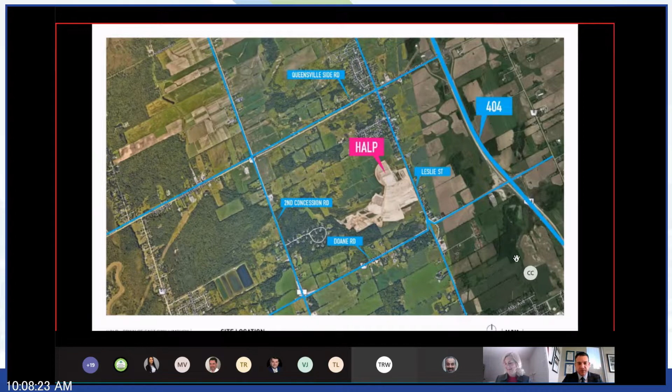Just a reminder, it's been a long time since we took that bus tour out to the HALP site with our new council. The HALP site is centrally located in Queensville, just north of Doane Road, and just a quick drive from Highway 404. Next slide, please.

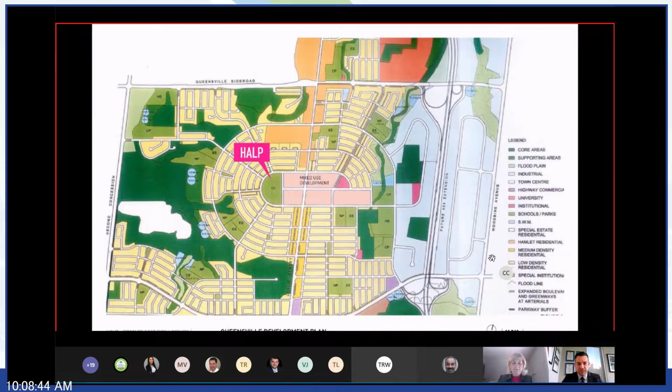The Queensville Center, building upon our initial plans with our developers, is a complete community: parks, trails, schools, community center, homes and businesses, and of course the Health and Active Living Plaza site.

I'm now going to ask Chris Catania, our manager of municipal facilities, to present the community as a design committee approach to designing the Health and Active Living Plaza.

Thank you, General Manager Karmazin. As an integral part of the concept design phase, MJMA and the Town Project Management Team have conducted an extensive public outreach campaign. More than 30 public meetings, special events, and public open houses have been held with residents and community stakeholders seeking input on the Health and Active Living Plaza design.

Public open houses were conducted, giving East Gwillimbury communities of Mount Albert, Holland Landing, Queensville, and Sharon an opportunity to seek public input into the project.

Utilizing different avenues, providing the community as a design committee has garnered over 600 comments regarding the design, programmatic elements, and facility fit for the Health and Active Living Plaza. Common themes arising from the outreach include fitness, which would include cardio and weights, aquatic programming and features, library programs, which would include makerspace and music rooms, an indoor playground, multi-purpose programming, and outdoor play spaces.

The HALP will be approximately 80,000 square feet. Of that, aquatics and adjacent change rooms will provide a third of the facility, followed closely by the gymnasium, track, indoor playground, potential fitness, and library. The gross area of the HALP also includes the indoor boardwalk and common spaces.

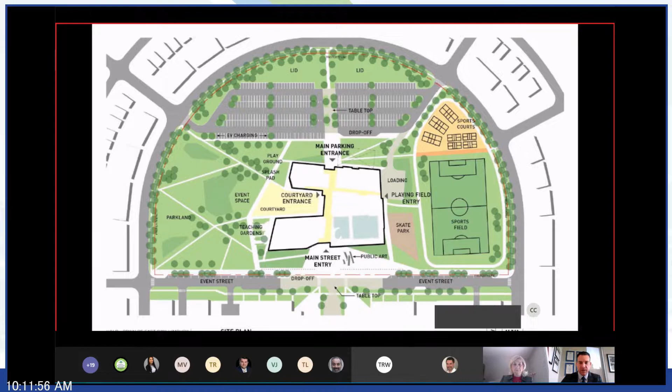I'll now turn it over to Chris Catania to talk about future expansion plans. The site concept provides flexibility for future facility expansion. This would include adding on to the library, future full court gymnasium expansion to the west, and the potential for childcare as well.

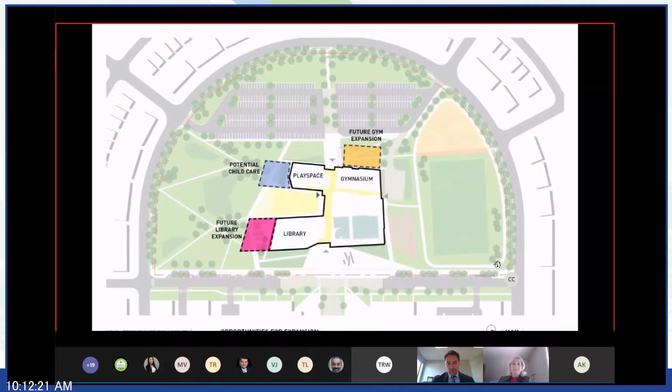Thank you, Chris. The plan is organized as a social hub, a major social space that runs right through the center of the building, meant to be inviting and to organize the major program components. As Aaron mentioned, from the main entrance on the south side, coming from the boardwalk and the possible closure of that street, is a large event space.

On the right side, there's a leisure pool and 25-meter basin that's visible from the large public lobby. And further to the north is the gymnasium, with the second level running track visible in the upper right-hand corner of the drawing.

The central public open space figure of the plan is a large courtyard. This lets us have the library on one side, on the lower left, and the child space on the upper left, as buildings with complete openness to the public park, opening onto the garden space of the courtyard.

One of the program elements that Aaron and Chris have been great in developing are a series of multi-purpose pods - multi-purpose learning rooms, health and concession areas around these major program spaces that also open into the courtyard. They're the most flexible and multi-purpose components of the facility.

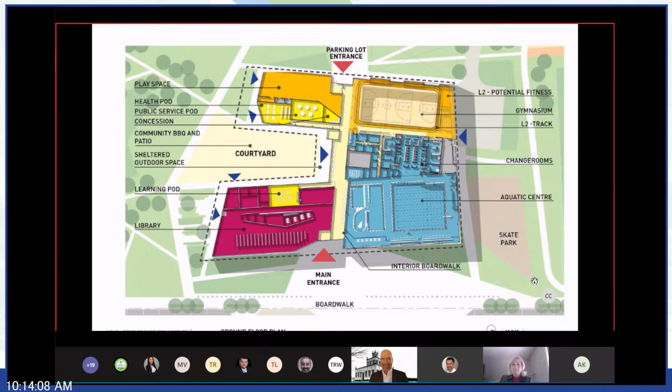I'm sure all of you are familiar with this image. In the way that we think about this design project, you'll hear all of us talking about the importance of public space, of connectivity to the larger context.

So it's important for us as a design team to work with the people producing design work for the larger community as well. Our design team has been working for a couple of seasons now with the development group working on the master plan for the future town center.

We see our project as fundamentally linked to the way the future town center is going to be planned. We think the concept of a town center will be amplified and made better by the way the HALP makes those kind of connections to the park and to the community.

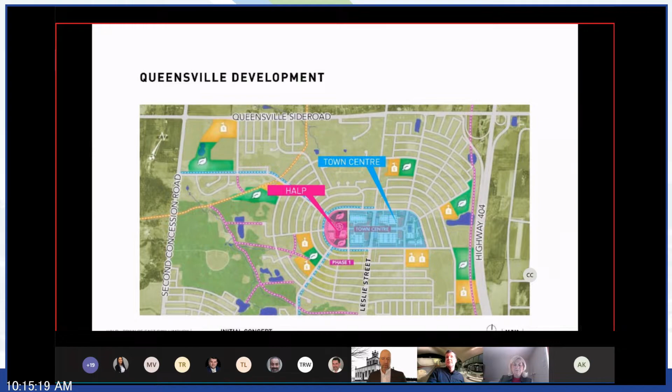You heard Vic talk about the idea of the interior boardwalk of our project and how it connects all the elements of the interior of the building together, and connects the building to the park space around it. We see those connections as equally important when you look at the project in the context of the future of Queensville. This graphic illustrates the way the HALP building becomes an exciting and vibrant terminal point for the main east-west street that runs through the future development.

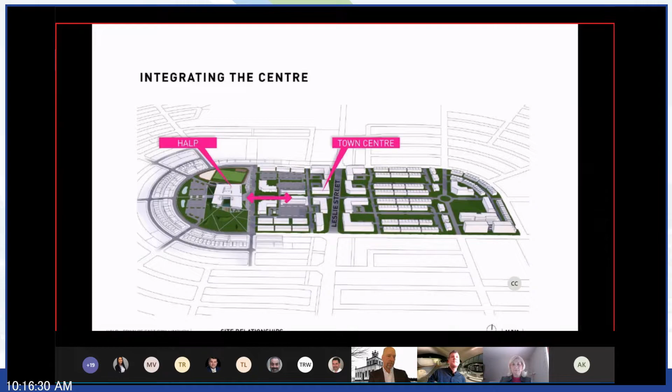I think really what's happening here is while this project will predate most of what will happen in the future development of Queensville, we still see this as a future focal point. You can see in the slide here a kind of T-shaped intersection where the main street terminates at the HALP.

That moment, what we're calling the health and active living room - conceptually a very interesting idea - this outdoor space bounded to the west by the HALP and to the north and south by future development, that urban square created by these multiple buildings coming together, we see as a really amazing opportunity to make a fantastic outdoor public space, which we're calling the front porch.

You heard Aaron talk a little bit about what could happen there. So on top of all the things we're doing inside the building, we see that moment where the HALP project intersects the future development as being a fantastic and exciting opportunity.

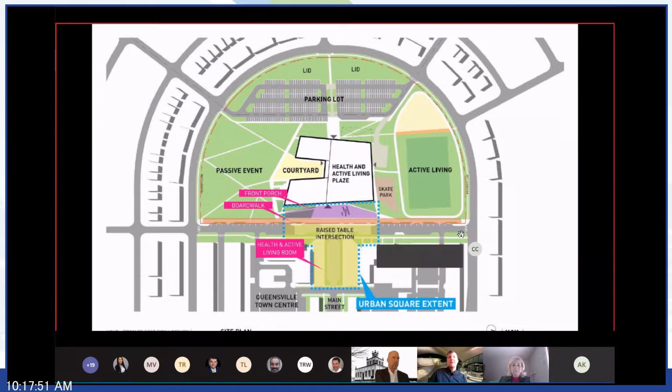Chris, I'm hoping that you'll jump in here and have some commentary about what our ambition is for that space. Thank you, Mark. I'll start off here.

The front porch concept, including the exterior boardwalk of the HALP, will be developed further with a landscape architect. The front porch will include interactive areas, potential program zones, as well as potential for a water feature. The exterior boardwalk that you see will also have modern furniture, plantings, and the potential for an East Gwillimbury Walk of Distinction.

Thanks, Chris. And further to that, the urban square extent, the health and active living room, will also feature interactive placemaking spaces. There's good examples of this starting to emerge across Ontario, and in particular the Greater Toronto area - a couple good examples would be the Mississauga Celebration Square, or even a larger example like the Yonge-Dundas Square.

Wi-Fi charging stations, potential for public art, some lighting displays, large-scale display screens that you may show concerts on, or sporting events, or arts and cultural events. It's essentially a gathering space where people will simply want to hang out, spend time, and interact with the HALP site, as well as the mixed-use area, which will have some residential, some shops, restaurants, boutiques, those types of things. So really, it's bringing and integrating the sites together to be a complete interactive space.

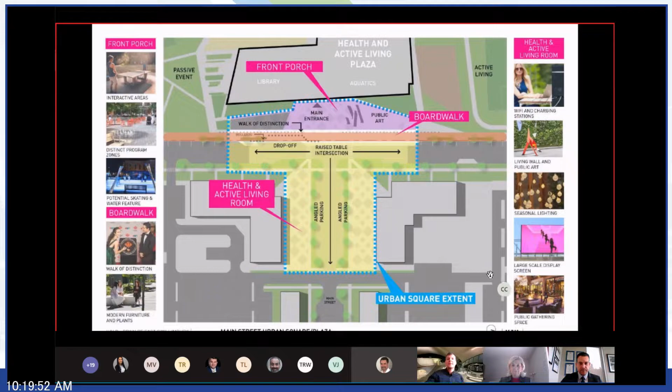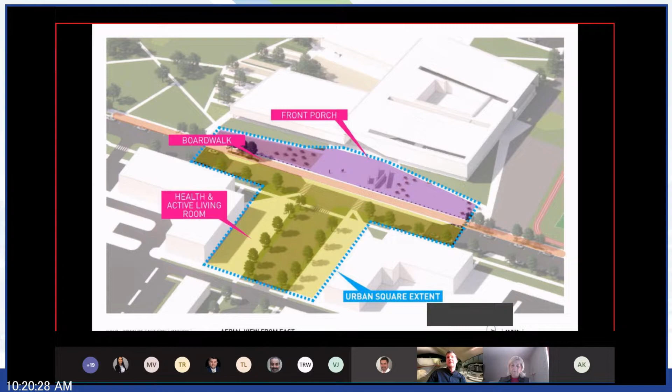So you can see that on top of the programmatic relationship our building has to your future park, we see our building as being a full participant in the way that health and active living behaves for the rest of the community at large. This three-dimensional view points out that the sculptural form of the building really does have that kind of character.

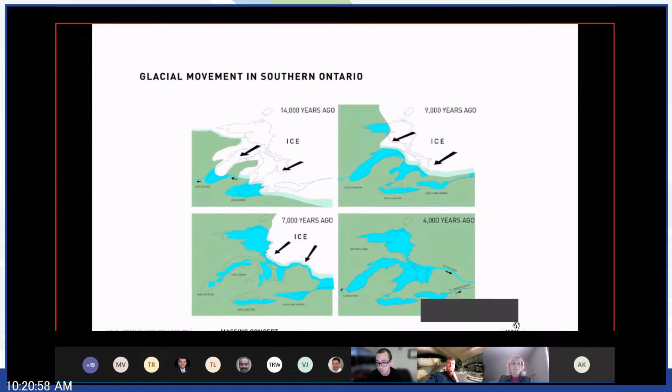As being a backdrop to this active, versatile, evolving outdoor public space. So for this part, we're looking at the development of the form and character of the HALP. For the design of the building, we started with an interest in creating an identifiable architecture specific to the place and the community. Given its impact on the landscape of East Gwillimbury, we focused on the theme of glacial landscapes as a starting point for the project.

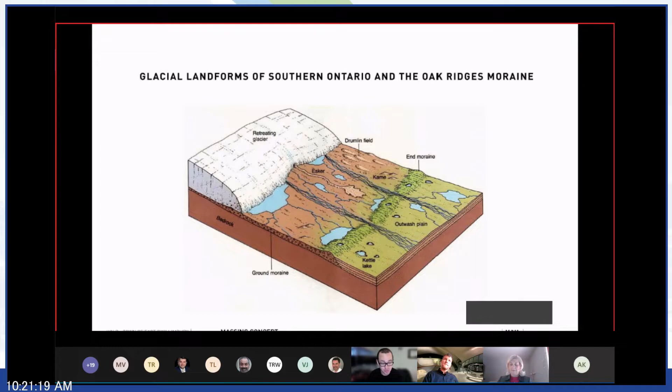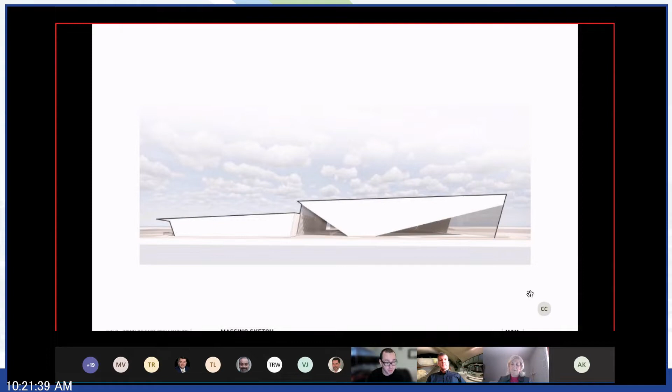For the building's form and its relationship to the surrounding landscape, we looked at glacial landforms specific to the Oak Ridges moraine. This included such forms as the drumlin and glacial erratic that could be found throughout the area. Here's an early study of the east edge of the site. This explores the concept of a fractured form, which creates an inviting promenade through the building. This also provides the opportunity to create a continuous clerestory above the space running east-west. For the study, we also were interested in creating a dynamic form with opportunities to develop interior-exterior relationships between the building and its surrounding site.

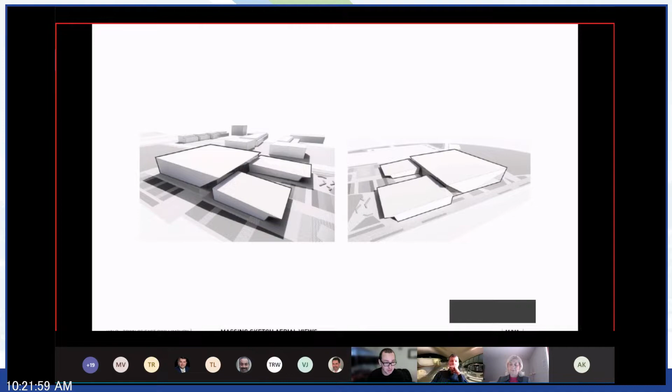Here's a couple bird's eye views of that same model. Here you can see the continuous east-west clear story running at the center of the building. And we're also seeking to create a south-facing courtyard between the library and play spaces.

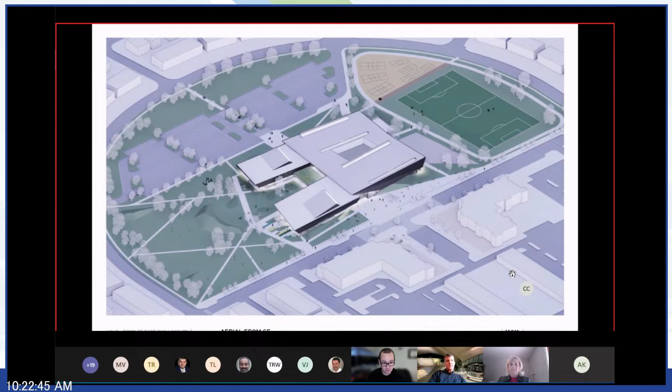On the east portion of the site, as Mark previously touched upon, we're showcasing the urban square and front porch. This is going to be a focal point and a terminus of the east-west Queensville Road, and will feature public art, games tables, seating, and event space.

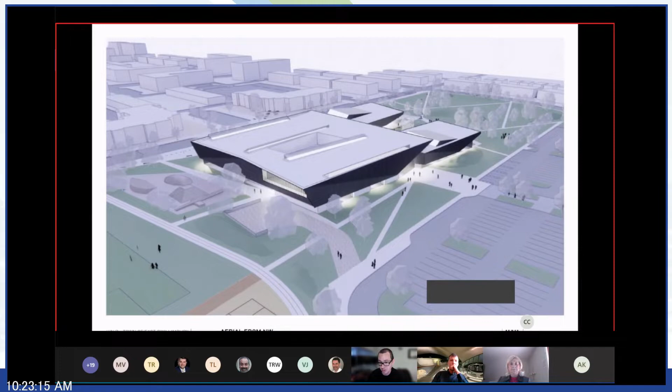We're seeking to create entrances on all four sides of the building, from the parking lot, from the Queensville east portion, from the courtyard area, and also from the north. We're hoping to utilize natural daylighting features, not only for the clerestory space running through the lobby, but also in the gym, pool, library, and play spaces.

In terms of material palette, we're seeking to create a warm feeling, and we're intending to use natural materials such as zinc cladding and wood for the soffit to give that natural feel.

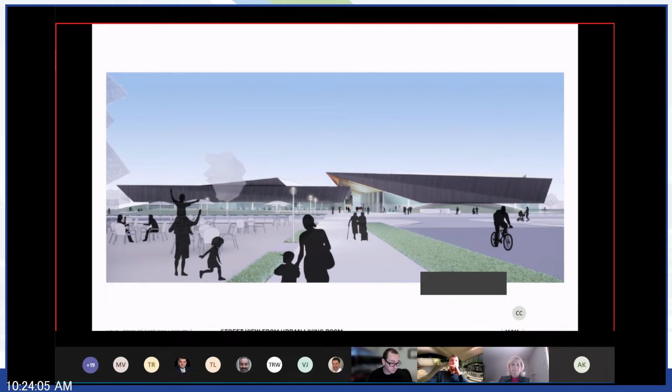Here's a view from the southeast, looking specifically at the library area. We're intentionally aiming to provide a large canopy on the south face of the library to provide shelter and connection between the library and park spaces. For the exterior perimeter of the building around the library, we're aiming to include program elements such as a literacy garden and seating to create a variety of seating places for inhabitation.

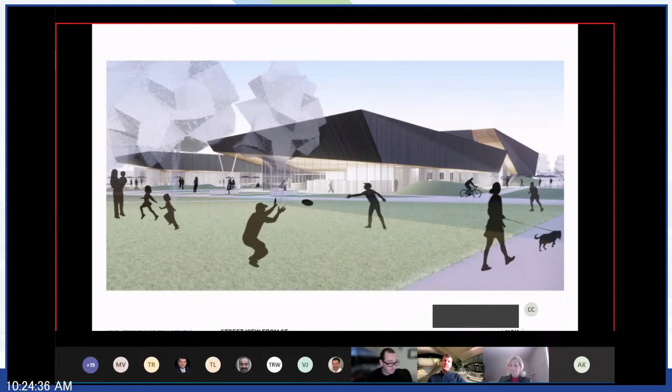And the program for the aquatics facility will include a variety of features such as a lap and leisure pool, lazy river, and hydrotherapy basin. We're also aiming to provide on-deck viewing for both the lap pool and leisure areas.

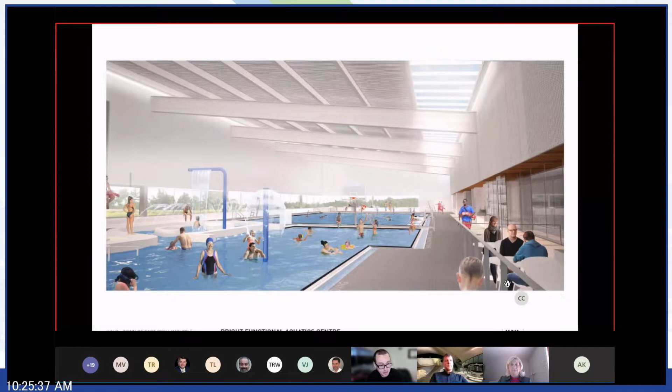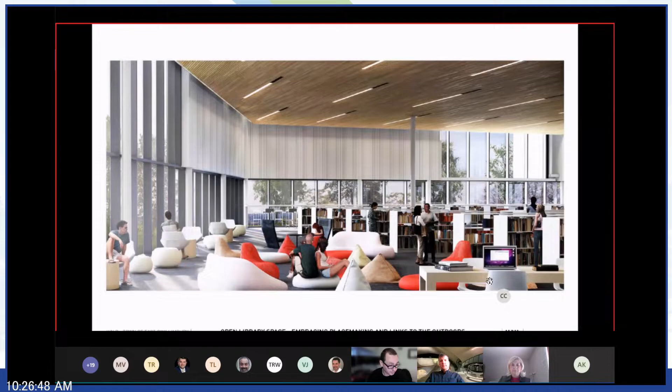For the interior lobby space, the goal is to function as a social heart for the community. We're aiming to create a fine-grained interior street catering to the viewing of activities, relaxing, and interacting with the community. Similar to all the other spaces of the project, we're working to create connections between the interior and exterior of the building, and potentially include public art as part of the lobby.

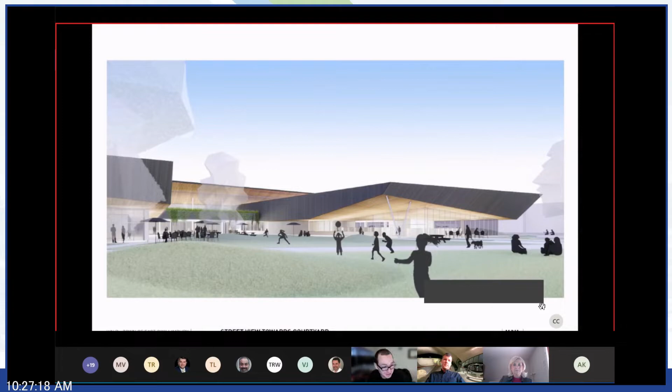I'll leave you with this last image. This is the south-facing courtyard. Our intent here is to create an inviting space with a variety of community amenities, including an outdoor kitchen and community gardens. We're aiming to cultivate a relationship with nature by creating natural landforms, planting, and potentially green canopy. The emphasis, again, is creating exterior and interior relationships through the strategic use of exterior glazing and positioning of canopies.

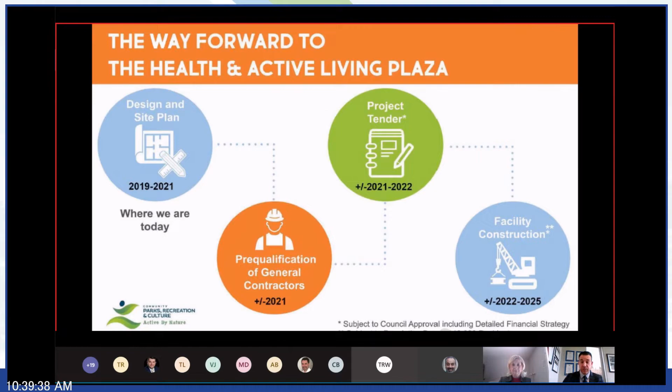Possibly tendering the project in 2022, and then based on population threshold and subject to council approval, commencing construction in the window of 2022, hopefully, but outwards to 2025, depending again on our population thresholds of hitting the 40,000 residents required for financial sustainability to operate the facility. Next slide, please.

So at this time, I'd like to thank staff and the architects for their work on the project, as well as CAO Webster and the SMT team for support of the project. But most importantly, a thank you to Mayor Paxton and Council for supporting the shared vision of the Health and Active Living Plaza. Thank you.

Thank you very much. Wow, what an amazing presentation. Thank you, MJMA architects. I think you've captured a lot of the ideas and creativity that members of council and our community have had, so I commend you for that. It's wonderful, and thank you to our staff led by Aaron.

It truly is an exciting time for us, and certainly a crossroads for sure. I wonder at this time if I could have a mover and a seconder to receive the presentation, please. I'll move it. Mayor, it's moved by Councillor Crone, seconded by Councillor Foster. Thank you very much. Do members of council have questions or comments regarding the workshop presentation, please?